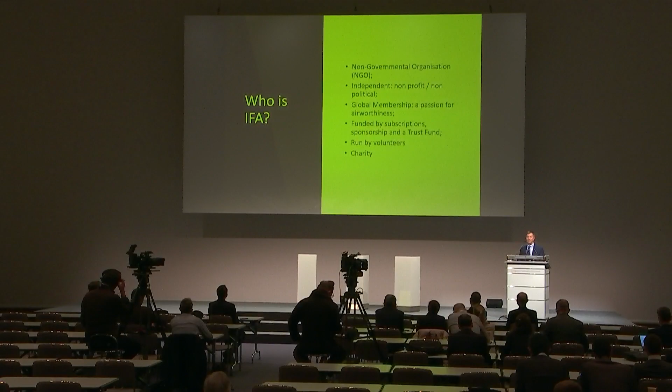So a little bit about IFA first. The International Federation of Airworthiness has been around since the 1970s. It's a charitable organization. We have a seat at the Airworthiness Panel in ICAO, entirely run by volunteers. We would welcome new members. We have some industry members, mostly from the airlines and maintenance communities, but we'd certainly welcome new members to support our work.

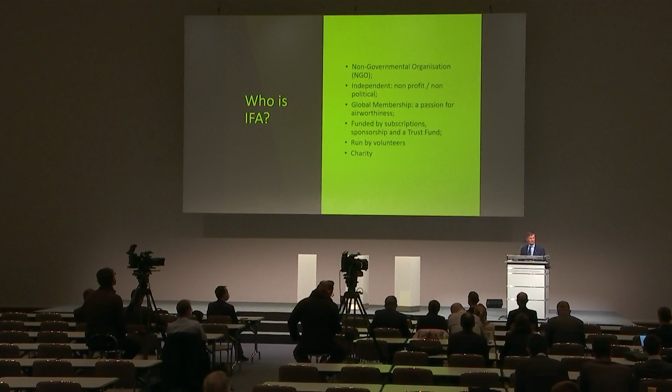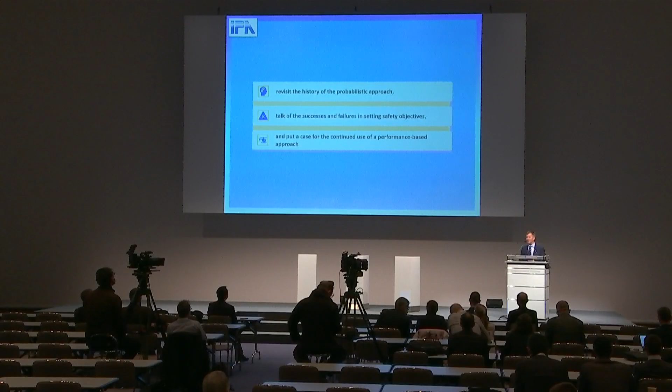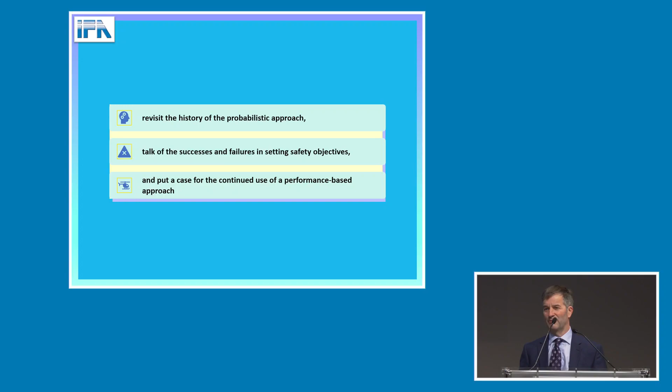So the presentation today has 3 parts. We'll revisit the probabilistic approach—why is it that we developed our airworthiness requirements, rules, standards, and specifications in this particular way? I'll talk about some of the failures and successes of the use of safety objectives, and at the end talk more about how we are developing towards a performance-based approach, and make a proposal related to rule changes which are on the table at the moment.

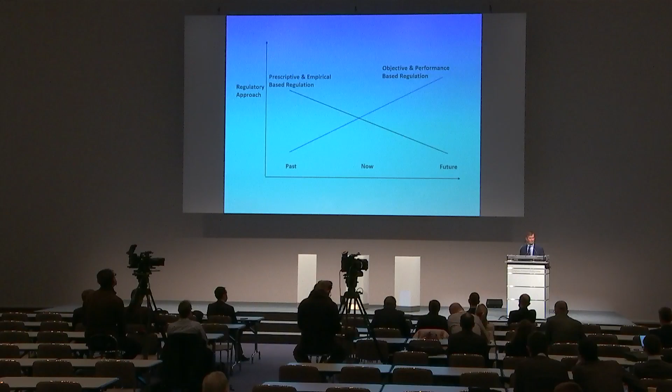So this is the journey that we're on. In the past, in the early days of transport aviation post-war, a lot of the technical requirements, rules, and regulations were prescriptive and empirical. A lot of safety work was done by inspection—you had a look at it, it was safe. Regulators prescribed: this is how you should do things, this is what makes something safe. But progressively over the years, this approach was found to be inadequate to face the technical challenges that were presented, and progressively and slowly we migrated towards a more objective and performance-based approach.

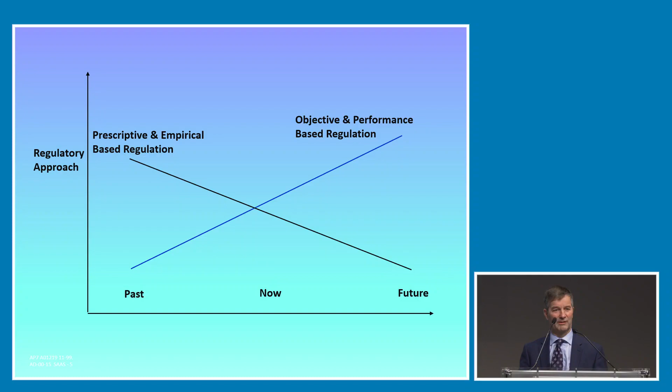And 1309, in its many forms across the FARs and the certification specifications, has been the center of that change in terms of introducing a safety objective into the design requirements.

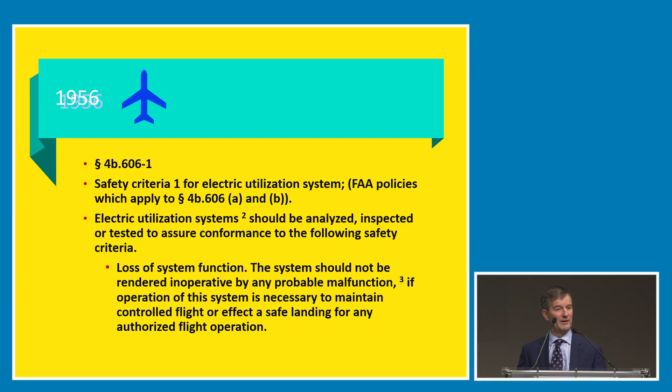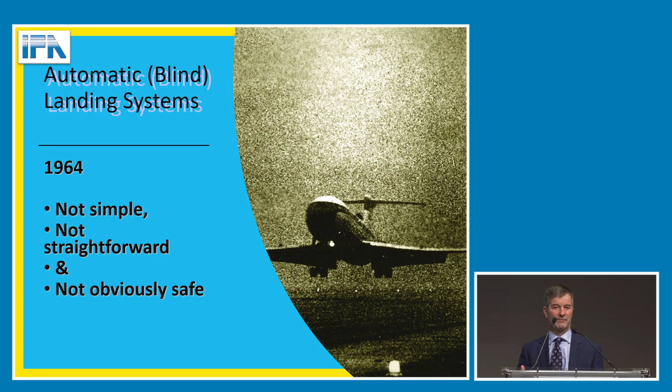So at that time it was more a question of inspection. The generation moves on and we're faced with ever more complex systems, pertinent given the presentation we just received from Thales. The first blind landing systems were introduced in the early 1960s, and they were not simple, not straightforward, not obviously safe. You would require a level of analysis. The main reason for that is the interdependencies introduced by having an airborne system with a critical function and its relationship with the ground-based system. So you have complex interactions, and you have to discover and understand those interdependencies to demonstrate a level of safety acceptable to the traveling public.

And then the question arises: well, what should that level of safety be? I can see the VTOL folk are struggling with that at the moment—what should that level of safety be to be acceptable to the public?

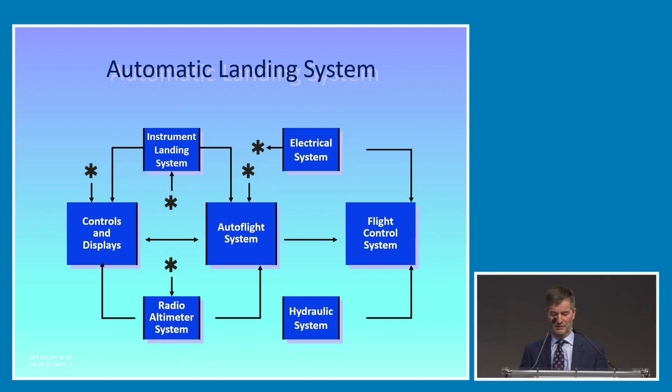So the overall high-level objective is that by introducing a new system, it should be no less safe than what it replaces. Ideally it should offer a safety improvement, but it cannot be certifiable if it is less safe than what it proposes to replace. So you have that high-level objective. At the time, the mid-1960s, the fatal accident rate was about 1 per million landings.

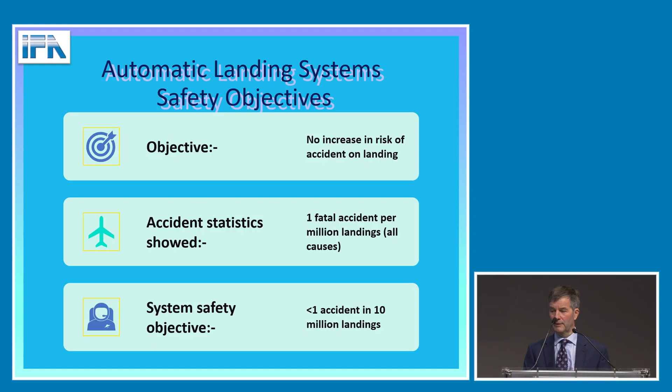Of that, the systems causes were considered to be about 10%. Remember, we're considering all accidents, not just systems causes. So the safety objective was set at 1 per 10 million landings, and that was incorporated in the requirements.

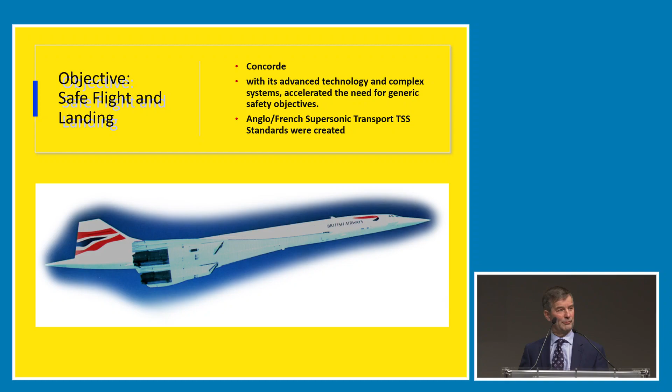The next step change that forced the path of development of that probabilistic approach, the need for a system safety assessment even further, was Concorde. Because Concorde added another order of complexity to air transport. In the TSS standards, I still have a copy at home of the safety assessment requirements. You see some of the early language of the 1309 requirement that we apply today, and that's really because of the complexity of some of the systems there, particularly the engine intake, the transition between subsonic and supersonic flight, critical systems.

Once you have accepted these principles, we need a generic requirement. So where did the 10 to the minus 9 come from? Now, I've seen several explanations, so please don't take it that this is the only way of explaining the route to the 10 to the minus 9. There are other ways of viewing this, but it's my route to that particular explanation.

If we go back to the mid-70s, as requirements were developing, we had about 4 accidents per million flying hours. And of that, all systems, aircraft systems, in a given type, again we use that 10% figure. In my days of safety analysis, 10 to 12% systems causes is not unreasonable. It's not easy to put an exact number on it, because there are so many factors involved, but 10 to 12% is about reasonable. So the system safety objective was set at 1 per 10 million hours, all systems on a given aircraft.

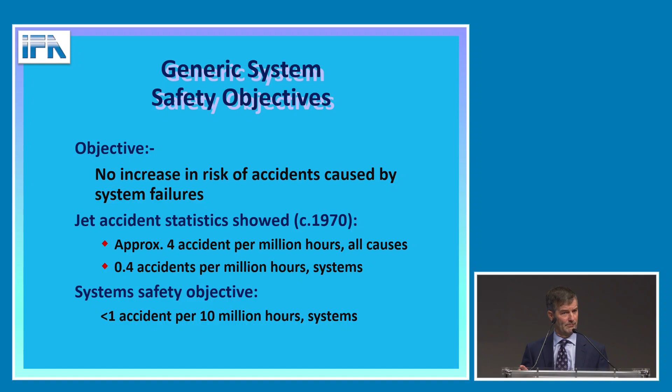If we take that a little bit further, in terms of what objectives should we set for an individual failure condition that may cause a catastrophic outcome, then let's assume there are 10 critical systems on a given aircraft, and of those 10 systems, each has 10 potential catastrophic failure conditions. If you factor that in, that's where you come up with the 1 in a billion, the 10 to the minus 9 per flight hour, as the safety objective for a failure condition creating a catastrophic outcome.

And it was embedded in the requirements, and it's been there in 1309 now for many a year, and it's demonstrated actually to be quite successful as a safety objective.

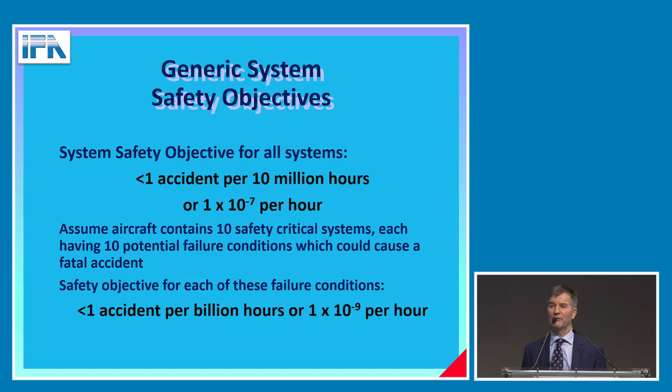Now, dealing with probabilities, you might say 1 in a billion, that's enormous, it's huge. Or tiny, minuscule. But it's not, in our everyday lives. Many of you are sitting in front of laptops with terabyte drives. So big numbers, small numbers, part of our everyday lives now. We take it for granted, it all goes on hidden from us. But these big numbers, these small numbers, are not necessarily alien to everyday life.

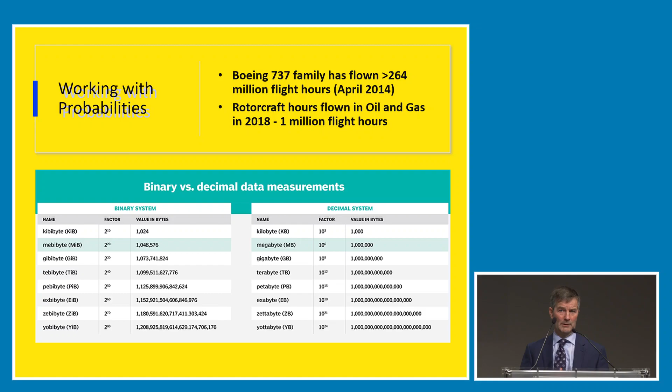Now, the aircraft that's almost reached the billion flying hours, if you look at the 737 over its entire history from the 1960s, is the type that gets closest. But if we look at rotorcraft, oil and gas, from one of the safety reports recently, we see about 1 million flying hours a year. So the numbers accumulate very rapidly.

Underlying are the principles that I've already mentioned, that there should be no increased risk of accident by introducing a new system or a new aircraft type with new systems. But having set one objective, at the other end of the scale you have, say, no effect. Maybe if I'm carrying my calculator on an airplane, it has no effect on the safety of the aircraft. It might, I suppose, if the battery catches fire, there are other factors to consider. But there are systems of no effect, and there are systems which are critical to the safe flight and continued flight and landing of the aircraft. So you have this inverse proportion.

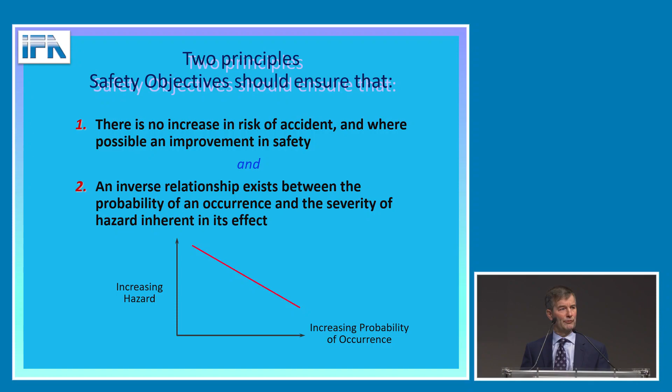That in itself is not enough. You need to be able to segment that, to explain it. In the early days of 1309, we divided it into 3. So my certification work in the early 90s, we had 3 levels. Software guidance, we had levels 1, 2, and 3. But it was found again that this was inadequate. The problem being that level 2, that level in the center there, is far too broad. It encompasses far too many systems, and the difference between failure effects at the top end and failure effects at the bottom end are enormous.

So as the requirements developed, that was subdivided, and we have what we have today: 4 basic categories and the proportionality, the inverse proportion relationship embedded in 1309.

And I'm glad to see that there's harmonization now occurring. It's not just 25-1309, 23-1309. 27 and 29 are being harmonized around exactly the same set of principles, using exactly the same language, so that we have a common language to talk about a system safety assessment.

And it occurred to me with the Thales presentation, where you're taking components from a large transport aircraft, like the smart actuators, and you may be reusing some of that safety data. Then you need that common language, you need that common method, you need a generic expression.

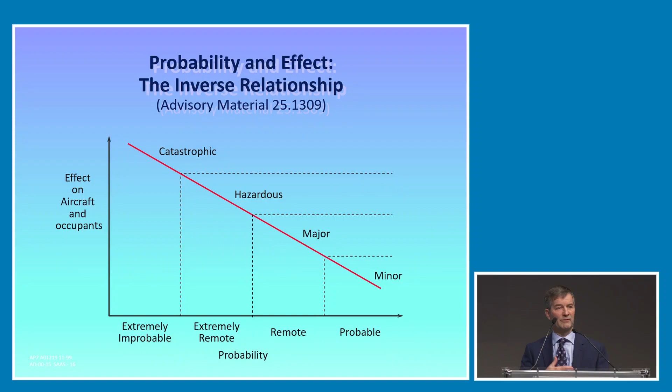In reality, of course, there are 5 levels. I've mentioned no effect. And if many of you are familiar with safety management and using risk matrices, the 5x5 matrix is probably the most commonly used. So 1309 has consistency with other safety methods and techniques.

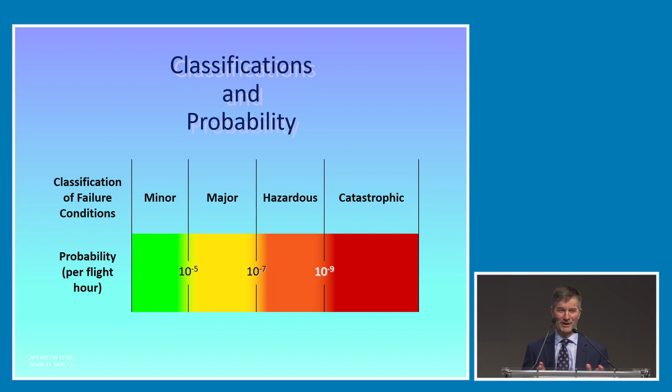So this is what it looks like, where we equate the words with the numbers and demonstrate the proportionality that was inherent in that graph. Now, this is very simplified. I'm not getting into any of the probabilistic mathematics. In fact, it's more to do with the expressions that we use.

There's often an argument here in the hazardous category as to whether that means fatalities or not. Certainly for a small type, like a small helicopter, it should not mean fatalities. But if it was a very, very large aircraft, maybe 1 or 2 fatalities may be considered within that category.

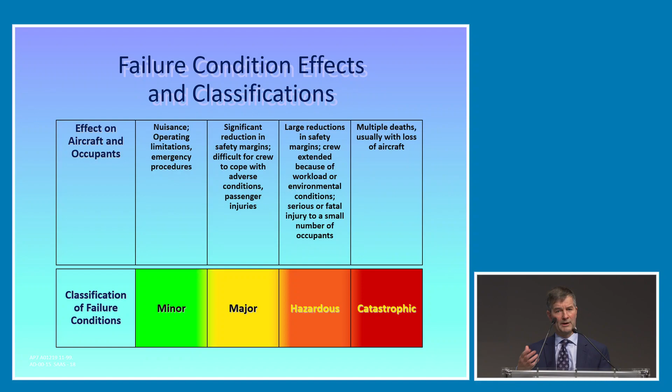So we're harmonizing these definitions, and I think that offers a lot of benefit for the future.

Strategies for risk reduction in systems architecture. This is a bit of a teach-in, you guys know this stuff: 1 channel, 2 channels, 3 channels.

Nicely, if we look at a very crude analysis here, dealing only with small numbers, say the maths only works with small numbers, 1 in 1,000 failure. Now that's not a good system, really. We should expect better of electronic systems than that. But we can easily meet with a triplex configuration.

And that's not always 3 independent similar systems. That may be dissimilar systems. There are a number of different strategies for meeting the 10 to the minus 9 target, and all very well known.

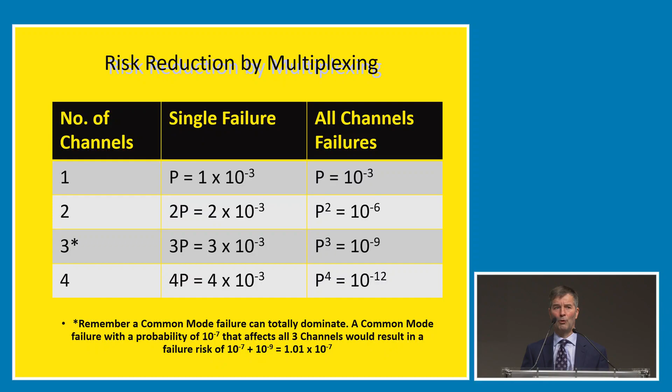So what are the key questions of system safety assessment? What is the system? System definition. What does it do? What can go wrong? Looking in depth at the potential failure conditions.

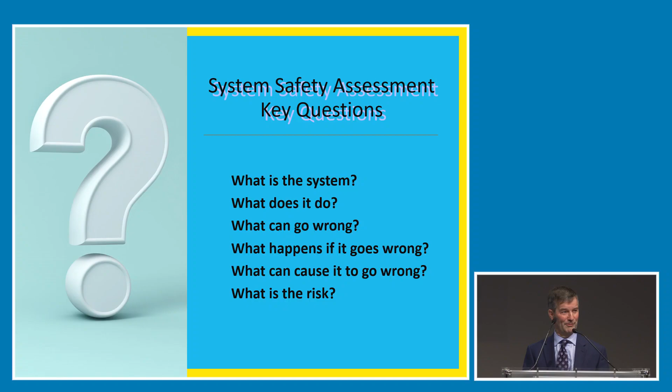What happens if it does go wrong? What can cause it to go wrong? Looking at the environment in which it's operating. What is the risk? That's the classification. And can we accept that risk? Does it fit within the boundaries we have set in that proportional relationship?

So here is a very basic functional hazard assessment, looking at, say, pitch control of an auto-flight system. You can have the loss of, but we mustn't forget the other failure conditions, like some kind of hazardously misleading information, or when we're dealing with control systems, oscillations or divergent effects, and the effects they may have consequently upon the aircraft in flight. And that's how you identify the various failure conditions.

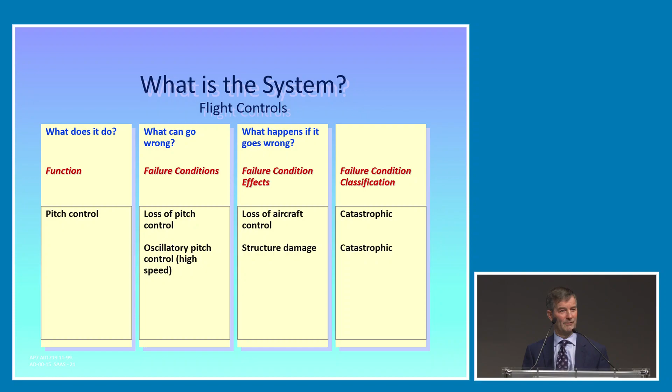So 3 steps in the standard system safety assessment. First, functional hazard assessment. And second, you get into the number crunching, the safety analysis. But it's not just a question of number crunching. There are, again, a number of different techniques that can be applied, and these techniques are developing with digital twins, with simulation. There is so much more computational technology that we can apply to the analysis process now.

And the outputs are a demonstration to the authorities that the system is certifiable, but they are also systems limitations. That may be emergency procedures in the flight manual, maybe abnormal procedures, and candidate maintenance requirements, because certain elements of the systems may require regular maintenance, or at least some kind of monitoring.

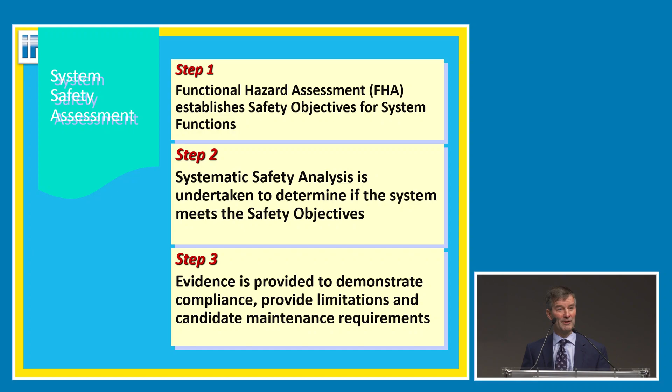Many different techniques for analysis. We're most familiar, I think, with fault trees, the tool that are most commonly used. Dependency diagrams, design appraisals, engineering judgment still comes into the process as a whole.

When you're looking at probabilistic numbers, you may have FMEAs for particular components. You may have a component history. You may not. You may actually be gathering that data and making judgments on the validity of that data, which is where the design appraisal comes in.

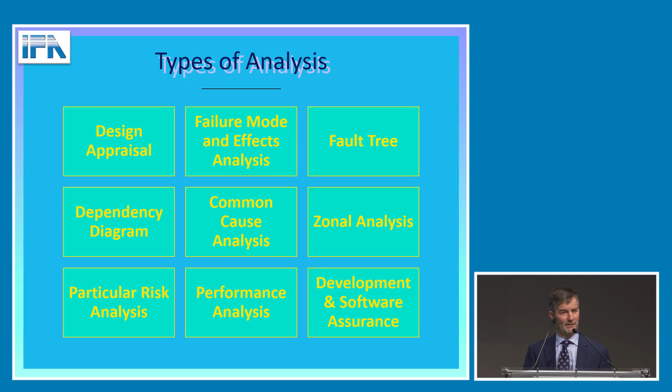So putting all of these various techniques together, you can build a believable system safety analysis. And often that's done as an iterative process.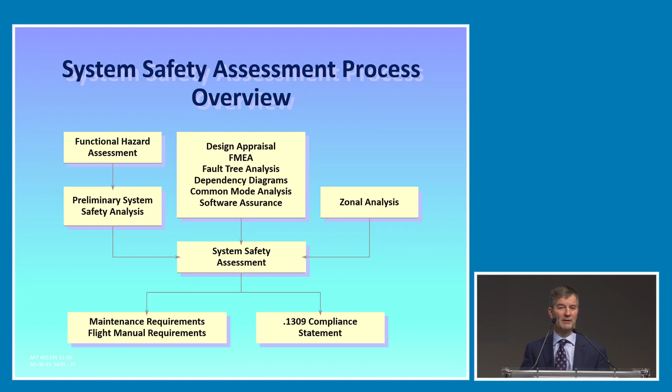It's not a one-shot process, because you may discover something in the analysis which requires you to go back and revisit the design. You may discover something in flight test, for example, that requires you to go back and revisit the design. And so the safety assessment that you provide at the end that results in those outputs, compliance demonstration and limitations and maintenance requirements, may be part of an iterative process.

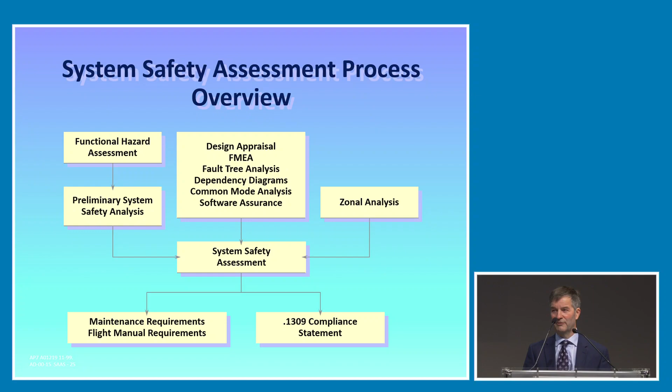Safety advancement. How do we make the world safer? I was very pleased to see the Thales presentation. I remember many years ago, I was with Westland Helicopters, Leonardo, working on what was then the EH101 that became the Merlin, and the flight control system there, and the displays in the cockpit. But seeing some of that large helicopter, large aircraft technology migrating to the smaller vehicles is incredibly important.

Back in 2014, we had a helicopter safety team here in Cologne at EASA, and one of the reports it produced was to look at new technology opportunities to provide safety improvements for helicopters in operation.

Glad to see in the European Safety Plan, or the Plan for Aviation Safety currently, there's a rulemaking activity which addresses the harmonization of 1309. It's out for comment at the moment. I believe the comments go to you, don't they, Clement? Yeah. So it's for you folks to comment.

It has very much the concept of proportionality within it. It brings the same language to ensure consistency across 1309 from the different certification specifications, from the different FARs, so European, US harmonization. It's very much to be encouraged.

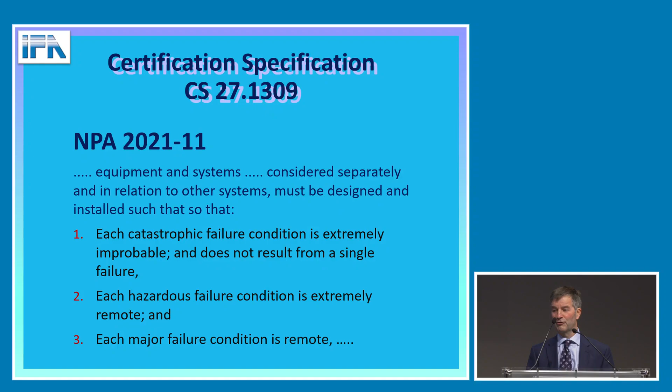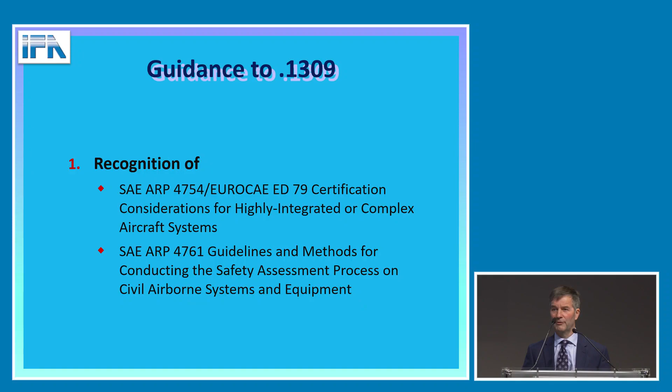It recognizes some of the foundation documents that we have as guidance, looking at development assurance. It gives a formal recognition to those documents in the change to the requirements.

But, and here is my last point, at the moment, we set safety objectives, we demonstrate that we meet those safety objectives, and then we close the books until something bad happens.

And if we have an accident or an incident, we may go back and revisit those safety assessments and say, did we get it right? Did we get it wrong? What happened? Why did this happen? Hey, we had this as this probability, but in fact it seems to be a different probability and outcome.

So shouldn't we have a continuous process? If we actually believe in performance-based regulation, then it does mean having a feedback mechanism, at least for the more critical failure conditions, and regularly revisiting the assumptions embedded in the safety analysis.

So this would be my call, and the words in quotes there come from a certification process study that was done 20 years ago. And it recommends, really, that there should be a regular review of the assumptions embedded in the safety analysis. And in the past, that may have been impractical.

But today, with the amount of data we have available, with cloud-connected avionics, it's not difficult to do. That's my argument. So thank you very much for listening to me.

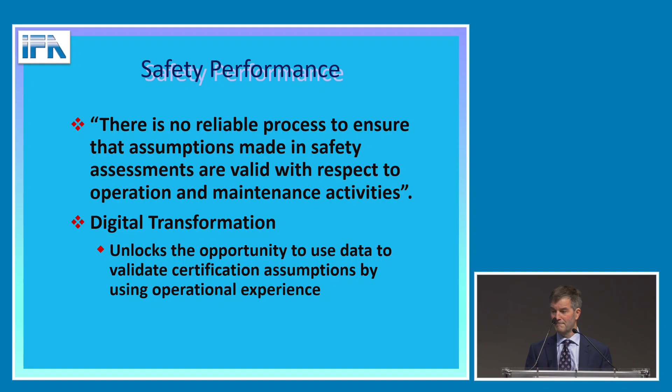To sum up, it's not just about the numbers. It's about having a systematic methodology and applying that systematic methodology. System safety assessment has proven itself over the years as a successful technique.

It's not just on your to-do list for the certification authorities. Here is a wad of documentation. Yeah, the show me part is part of certification, but it's also to produce a better design.

It is about a qualitative method informed by quantitative methods, because there's still that element of sound engineering judgment required. And, as I've mentioned, more data becomes available.

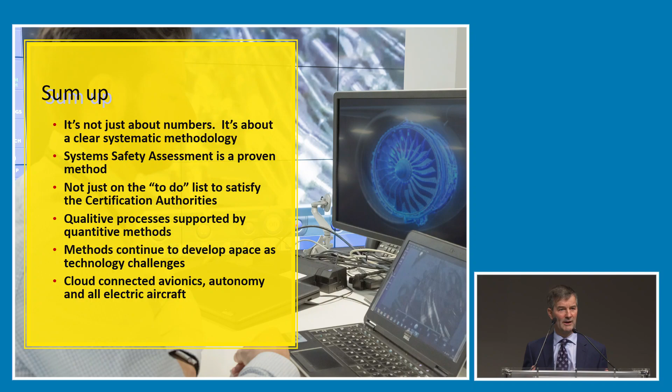So methods and techniques, simulation, digital twins, new ways of approaching safety assessment become possible with cloud-connected avionics. Vast amounts of data will be available to us in the future. That's my message for today. I hope you found it useful, and I thank you very much for listening to me.